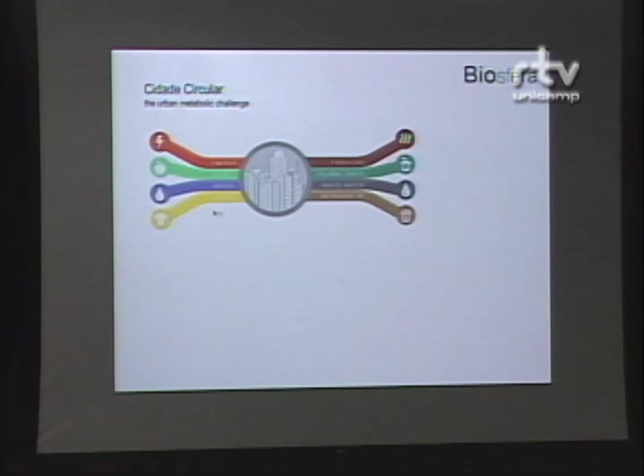What does that mean? Basically, into the city, we have flows of energy, food, water, and goods. And the output of that, for instance, energy in emissions, food in organic waste, water in wastewater, and goods in inorganic waste. Now, looking at the footprint of a city, we see that the more the loops, the cycles of these metabolic flows, are not closed, the larger the environmental footprint of the city. In other words, the environmental footprint of the city exceeds the geographical footprint. So in a circular economy template, we look at how the loops for water, energy, waste, and food can be closed. And in the different technological developments in this sector, water is key.

So basically, a bit about the background. We developed a system called Cidade Circular, which specifically looks at the decentralized possibilities to deal with these metabolic flows in the urban environment. And we introduced this subject exactly a year ago at FIESP. And already then we were talking about the arguments for decentralization, specifically in the water sector. And we put forth some data that we had studied.

For instance, that in the urban periphery of the Sao Paulo municipal area, between 40 to 60% of the households are not connected even to the most basic sanitation infrastructure. But at the same time, 25% of all collected sewage is lost, 25.7% of all treated water is contaminated the moment it hits the supply chain, and then within that supply chain, about 30% is lost through leakage. Now, these are numbers that everybody is talking about, but last year we didn't get the feeling that in that forum at FIESP there was much of a crisis atmosphere.

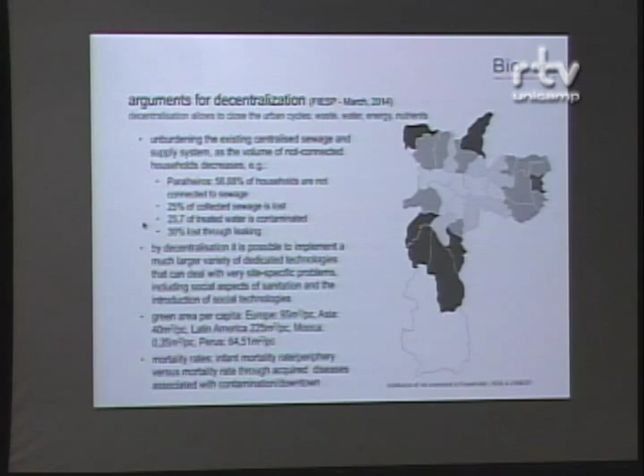We also looked at some other data, for instance, the distribution of green area per capita, and correlations like the mortality rate in the periphery, which is associated with the lack of basic sanitation, is of course much higher than in downtown Sao Paulo. But then when you look at the mortality rate as a result of acquired diseases that are associated with contamination, specifically soil and water contamination, the rates are much higher there.

So in other words, the argumentation for decentralizing the water infrastructure is that you already have an overburdened system, and if you would want to make connections for those households that are not connected yet, you're going to overburden it even much more. Again, I said, where I come from, which is Holland, if we would have these kinds of percentages, there would be a crisis, like governments would fall, utility companies would go bankrupt, people would go to the street. But we found already last year that this is sort of business as usual.

So what is this crisis? Is it really a crisis of drought? I will not go too much into this slide, but basically from the point of view of circular economy, of the urban metabolism, the higher the overlap between natural ecology and monetary economy, the higher the extent of sustainability. Because in the natural environment, the function of symbiosis takes care that all metabolic loops are closed and they are multidirectional. Whereas in our built environment, which is linear, the loops are sort of dots connecting the line and the flows are in one way.

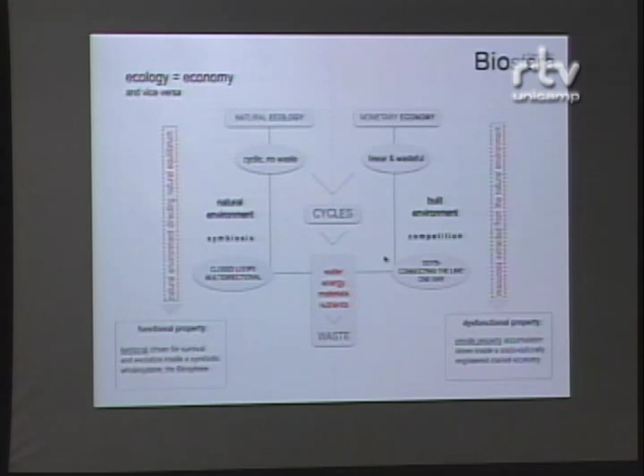So we look at systems, technologies, methodologies, approaches that can close these loops and go to more circular systems, which by nature are more sustainable. Then let's take stock.

In a very straightforward way, I will run the risk that all this may be very simplistic, but I have the urge to take stock after the debate yesterday, because we talk about this crisis and the focus has been very much on the dwindling levels in the reservoirs. But what really is this crisis?

Let's say there's a scenario in which the hydrological system, the rivers, the headwaters, from upstream to downstream in Sao Paulo state and specifically in the urban areas would not be contaminated. The question is, would there still be a drought crisis? If we could use the rivers for water collection, then would there really be a problem?

In other words, the water security in the current water infrastructure is pretty linear, or monofunctional as it's called, meaning that we have a hydrological system with headwaters, with rivers, with tributaries, with a high degree of degradation of the riparian ecosystems and ecosystems in general, and a lot of loss of bioretention. Then we are dependent for our water supply system on the reservoirs, and by now levels are dwindling.

Now whether this is due to climate trends, meteorological trends, man-made or not, of course it's very important to understand that, but on the ground, we can do many things to increase this water security. For instance, the loss of precipitation due to deforestation as a result of the lack of biotic pumps, which is a fancy word for trees, creates an atmospheric block in which we don't have enough precipitation to replenish the reservoirs. But again, basically, the crisis may be one also of management and governance, which was already established yesterday.

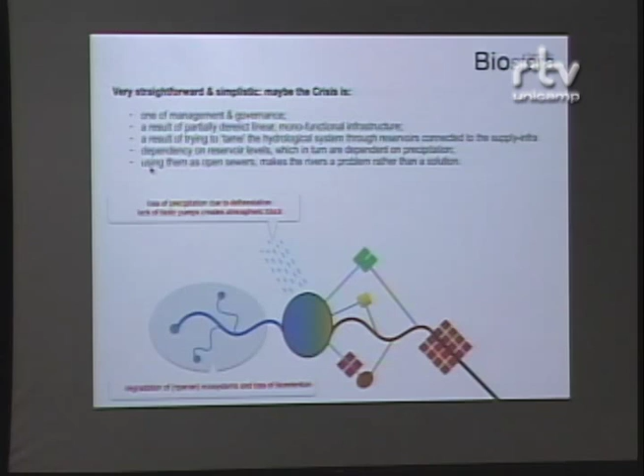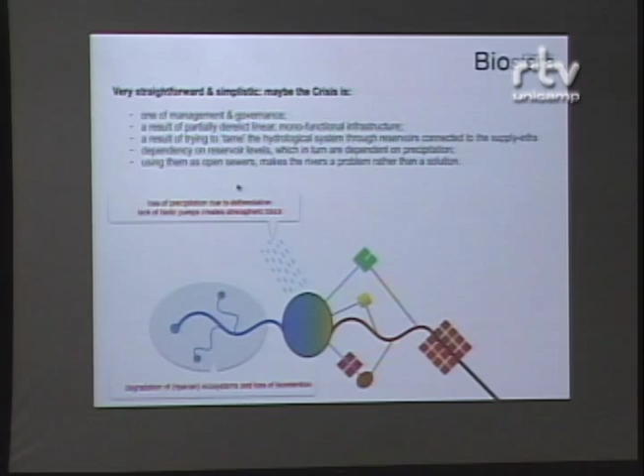A crisis of a derelict linear infrastructure which cannot anymore interact and meet the requirements of the growing urban population, which is also more diversified. Maybe it's a result of trying to tame the hydrological system through the system of reservoirs. And maybe it's also a function of the dependency on those reservoirs for our water supply. And then for sure, using them as open sewers makes the rivers a problem rather than a solution.

So in the same very straightforward and simplistic manner, what would we need? What could we do now in order to avoid this massive problem of overhauling large infrastructure connected to water supply and wastewater treatment? So we can look at water reuse, which will reduce the supplied water out of the reservoirs. For sure, we should look into creating gradual steps in reducing the load of sewage directly into the rivers. In other words, using rivers as open sewers.

And then the water crisis is real. There are people really suffering, really being hit by this, scrambling for potable water on a daily basis. So something needs to be done now to alleviate the situation of these people. And I think most importantly is to showcase systems, to implement pilots so that we can show that this is possible in Brazil, in Sao Paulo, and we don't have to wait for a long-term, multi-year planning stage that is implemented gradually to remediate the current crisis.

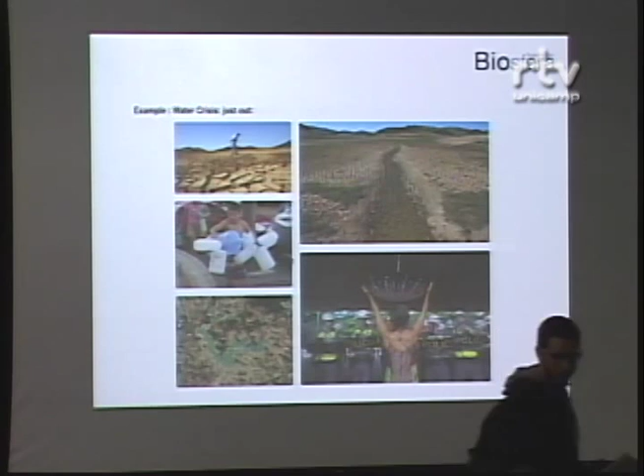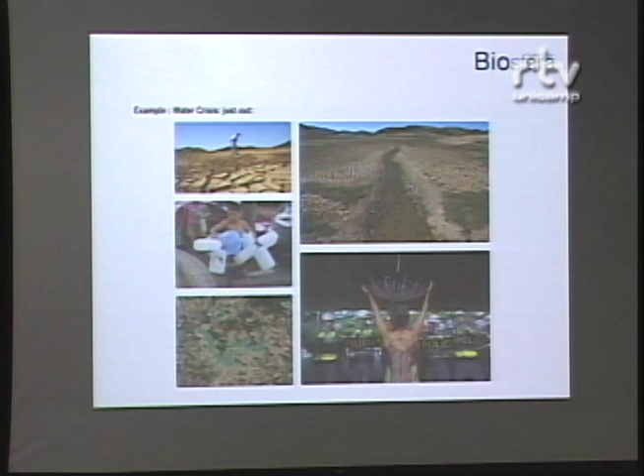So, in all the lectures until now, the pictures of the current water drought are featuring pictures like this, but what I didn't see is a picture like this. Maybe we don't really realize what it means if, on a daily basis, for a prolonged period of time, a young boy has to go out trying to scramble for water. It's a serious problem. It's really something that uproots the daily routine in life.

And the first technology I want to show is something very simple, community-based; it can be implemented with a community, by a community, doesn't require a top-down structure, and actually it's pretty efficient. So, without further ado, it's a project that we're developing together with a colleague of mine, Arturo Vittori, an Italian designer and architect. It's called Warka Water. Warka Water is a very simple structure. It's a structure called a grid shell, which is self-supporting. It's made by a design method called parametric design, which I will not talk about.

And basically you have an outer self-supporting structure, in this case made out of bamboo, which is another story I also want to talk about. And within that structure, a micromesh is suspended. This project was developed for remote communities in Ethiopia that have problems with their water provision. And the micromesh harvests atmospheric water, so dew water, water that is in the atmosphere, which condensates on the filaments of the micromesh.

And with the first pilot in Ethiopia, we were surprised to see, even without further developing the micromesh or optimizing the system, already between 12 to 20 liters of potable water are collected this way, which is good in that context for 3 to 4 households in terms of providing them with potable water. We don't see a reason why a project like this could not be implemented within urban communities in Sao Paulo.

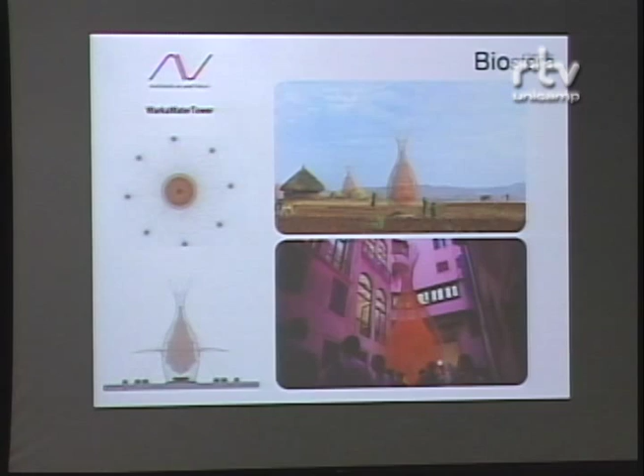Actually, this was also presented last year at Mackenzie. We're talking with Braskem to do the R&D on developing a bioplastic micromesh. And this year, in July, we are organizing a workshop. So here you can see the evolution of this technology. In 2012, there was the first little prototype in Ethiopia that produced the...

I'm sorry. There seems to be a technical problem. So that was a little technical intermezzo. It's a lecture about technology, so I guess that's proper.

So we are organizing this workshop in July within the CAAD Futures. CAAD Futures is a biennial conference about computer-aided design. This year it's actually organized by Unicamp together with USP and Mackenzie, and the subject is the next city.

So here we can see the evolution of the Warka Water bamboo tower. In 2012 we had the prototype for Ethiopia. In 2013 it was an upscaled version of that for Italy. Then last year in 2014 yet an upscaled version for a project in Lebanon. And then this year, as we speak, Arturo is now in Ethiopia doing even a further upscaled version, which will actually be able to service potable water for small towns, small communities, and also project shadow.

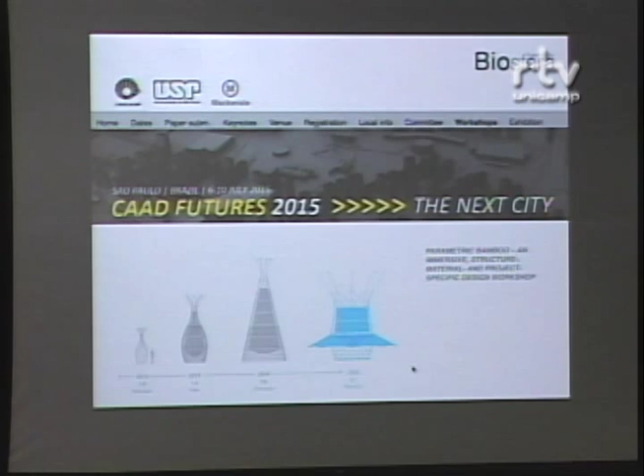And the workshop will be about: if the further evolution of this technology will happen in Sao Paulo, what would it look like? So we will have 2 days with designers, architects, artists, engineers, software developers, to produce a line of Warka Water towers for Sao Paulo. And then afterwards we will implement that as community projects in the Sao Paulo urban regions.

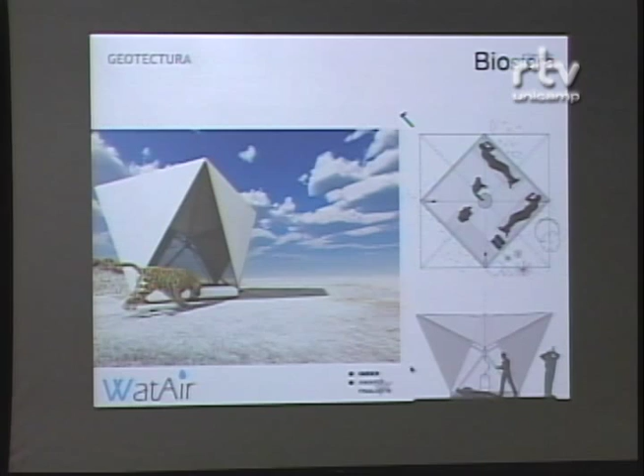Then there's another technology. This is in cooperation with Geotectura, which is an architecture firm that is licensed to the Haifa Technical University, which is called WatAir. And other than the Warka Water tower, this is really a product that could be developed, for instance, by the people that are involved in the communities and are familiar with this technology to sell, let's say, to more high-end markets. It's the same principle, only here we use a more engineered micromesh, and the yield of the micromesh is about 1 liter per 5 square meters.

And of course, there are many factors that influence the efficiency of the micromesh. Basically, those are parameters like the angle, the color, the wind speed, and of course, the humidity level of the atmosphere itself. And also here, we've used a bamboo frame. Water is collected into a bag that can then be placed in a device for potable water.

The reason why I said that this is more high-end is because this micromesh actually allows for the inclusion of a PV thin film, and so electricity is generated. For instance, enough electricity to power up your electrical devices like computers, mobiles, and you name it.

So basically, the cost of a Warka Water tower, the bamboo Warka Water tower in a mid-size version, is about $200, and that's the cost price of a pilot. So if you would create more, we probably can bring this down to $100 per pilot. So if this is shared or donated to a community, this is really a technology that even financially or budget-wise could be implemented now. A unit of WatAir in cost price as a prototype is about $150. But then, of course, the yield is much less because they're smaller units.

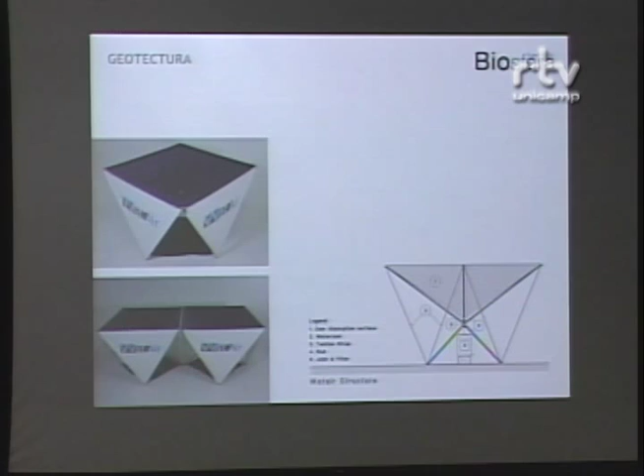So this is one example of how maybe a simple technology and something that looks like a gadget actually really can provide potable water in quite good amounts to communities that need it.

The second technology is a technology by a partner of Fundação Biosfera, Biopolis, and that looks more into the realm of decentralized wastewater treatment technology and water reuse, which is important because if we can implement wastewater treatment decentralized, it's possible to catch the sewage, the contaminants and the pollutants before it actually reaches the rivers.

Now, Biopolis is a spin-off company from Organica Water and Organica Technologies that, under the supervision of Istvan Kenyeres, the founder, has done 200 similar type projects throughout 3 continents using this unique technology, all within the context of urban integration and decentralized wastewater treatment and water reuse.

It's important maybe to understand that in our perception, because we always talk about low-tech, high-tech, breakthrough technology, next-generation technology, the highest tech, from our perspective, in terms of wastewater treatment, is the rhizosphere microorganism symbiosis. Now, yesterday there were some examples of wetlands and the use of ecosystems and the restoration of ecosystem services as a function to treat water.

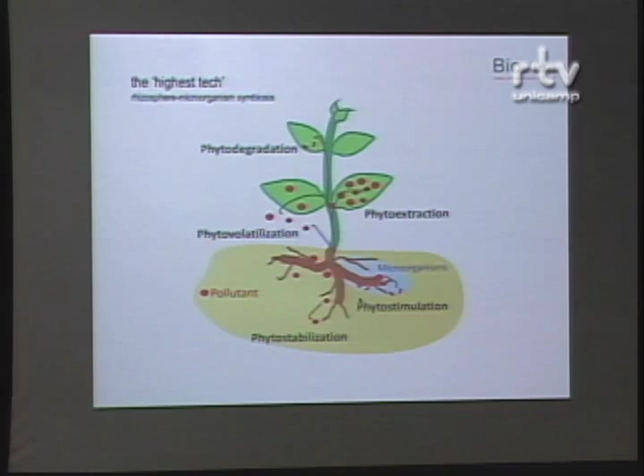And these microorganisms, of course we know this from activated sludge technology, which this year is exactly 100 years old. These microorganisms, bacteria, germs, actually are great agents in treating water.

So Biopolis has established a pilot plant in Budapest, and a pilot plant like that is simply above ground, a botanical garden. Below ground there are a number of installations for pre-treatment, but basically we talk about a garden with many different bioreactors, and the bioreactors of course are the plants.

Now, the reason why it's in a greenhouse is because in Budapest, because of climatological reasons, it's not possible there to do it without a greenhouse. But here in Brazil, it actually could be a garden, it could be a park, and would be perfect to integrate inside urban landscaping, public green.

Maybe we should let Istvan take us a little bit through the pilot plant. Before that, I must say that at the moment, Biopolis is creating an order portfolio for larger installations in Singapore, Malaysia, Japan, China, and also Germany and the Netherlands. Next week, there are some negotiations in the United States, and we really would like to implement a pilot plant. Why not actually in the university campus here of Unicamp, and bring this technology to Brazil.

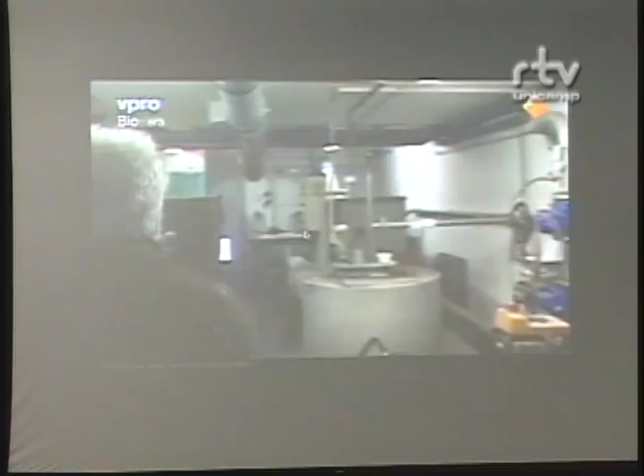So Istvan will talk, I will translate because he speaks Hungarian, it's subtitled in Dutch, I will translate in English, and then she will translate it into Portuguese. So

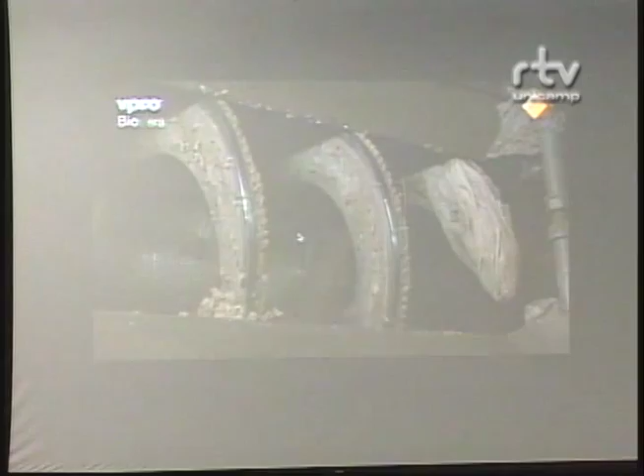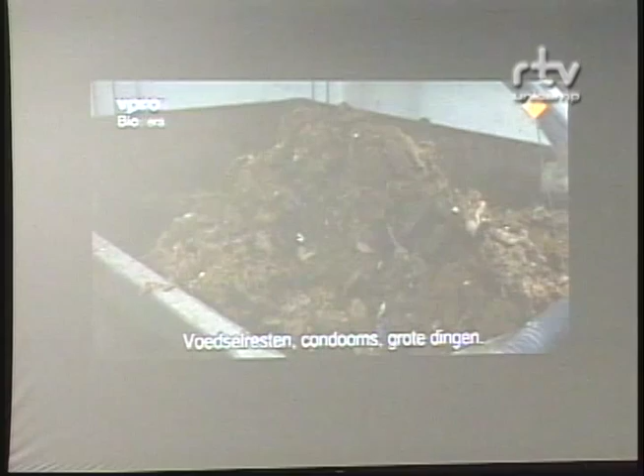Here below the raw sewage arrives. First there is a phase of primary filtering, taking the larger parts out of the sewage, like food rest, plastics, condoms, big things. That goes into the incinerator to generate electricity. Then this filtered water goes to the next phase, in which even smaller particles are filtered out. After that, the water is going into the bioreactors, the biological phases.

So here you see, it's a greenhouse. This is where the biological treatment is taking place with different bioreactors. Here, all the organic pollutants are being taken and processed out of the water, out of the sewage. And of course, we call them contaminants and pollutants, but for the microorganisms, it simply is food.

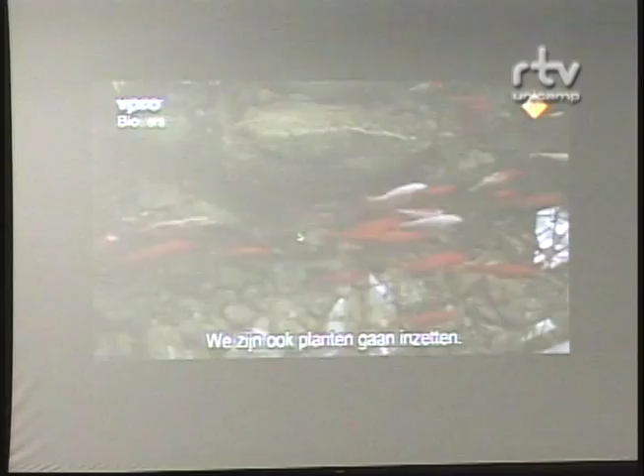The traditional activated sludge process was invented in 1914. And it used only about 100 different species of microorganisms. We, in the meantime, are using many thousands of different species of microorganisms to perform the water treatment. And also, we started to work with plants. Not because plants are such great contaminant uptake agents, but because of the root system, which has a unique surface that creates a perfect habitat for microorganisms.

So the only pollutants that remain are hormones and pharmaceutical residues, but we also identified the bacteria that can even filter this out of the water. If you can create a habitat in which microorganisms and other natural organisms can thrive, then you create a very efficient ecosystem.

An installation like this with a botanical garden of around 400 square meters can service 10,000 users. And it's only 1/5 of a traditional wastewater treatment plant. But the biggest change is the psychological and cultural effect of such an installation. Would you like to live across from a wastewater treatment plant? I don't think so. But what if you live next to or in a botanical garden that, by the way, also treats your wastewater? That's a completely different experience.

I think people should start to think differently, especially people that live in the cities and that aspire to live in and around green areas, especially if it treats their wastewater and produces clean water that can be used for many different purposes. So that was a little introduction by Istvan of Biopolus.

Then basically, we call them productive green areas, which again are fully fledged distributed wastewater treatment plants for water reuse. And again, this diagram explains better how it works: we have above ground the plants, then the rhizosphere is suspended in the water. Now typically the rhizosphere, the surface of the root system, is not sufficient to create a wastewater treatment system that is both technically and economically viable. So there needed to be a means of increasing the root surface artificially.

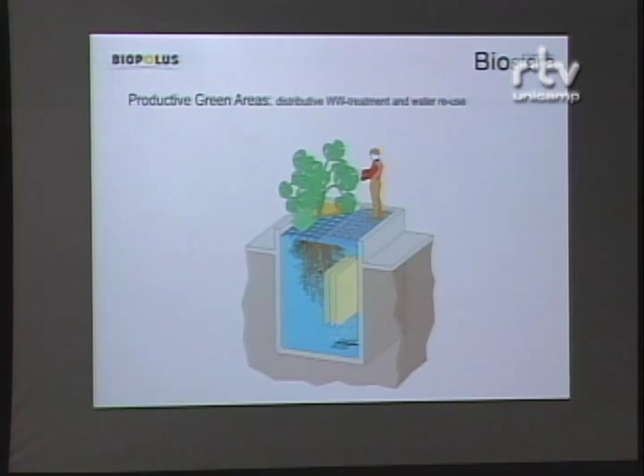Then more in detail, there are the specially selected planted ecosystems, which is a fancy word for different plants. There's a catalog of about 1,200 different plants that all have different endemic microbial species for different functions in dealing with different contaminants and pollutants in wastewater. And about a third of these plant species actually are native species in Brazil.

Now, in order to increase the surface area of the roots, there is a special artificial media developed which allows the microbial colonies, if you will, to create a biofilm on roots. And this is important because in traditional biological reactors, and for instance also in the activated sludge, the microorganisms actually are suspended in the water. They're like in a soup. And it's basically like us. If we are in the water, yeah, we enjoy. But all our actions are a function of not drowning. So the same for microorganisms.

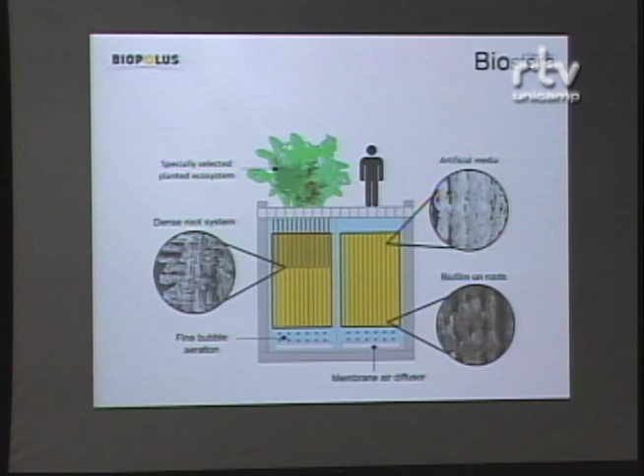That's one of the reasons wastewater treatment plants need to be oxygenated. But when the microorganisms attach themselves to a surface and create habitats as a biofilm, then the activity of the microorganisms is much more efficient, and they are able to deal with a much wider range of metabolic functions, another word for breaking down different contaminants and pollutants.

So just having a bit closer look at that, a section of a natural root and the biofilm it will allow to form on the surface never exceeds 1/10 of a millimeter. But in the artificial root, this artificial media, the biofilm can range from 1 millimeter all the way up to 1 centimeter. And then, of course, in terms of the spatial insertion of the artificial surface where microorganisms can create habitats, there's a ratio, always 1 to 100, can range up to 1 to 10,000.

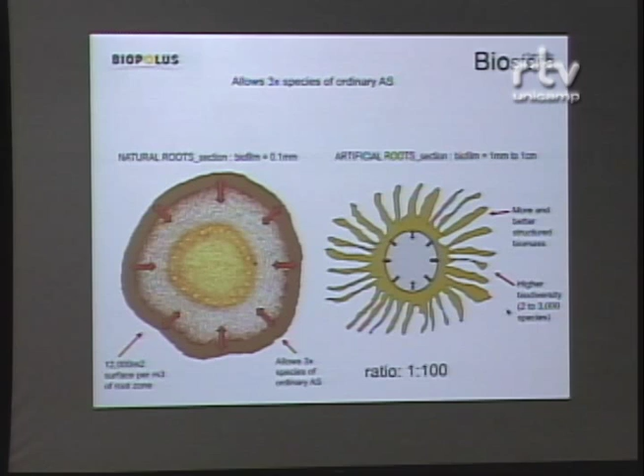Also, the artificial root has a much higher biodiversity than the natural root. It allows up to 2,000 to 3,000 species per bioreactor. Then in terms of the sequencing of this installation, so just to recap, there's the pre-treatment, taking out the larger part of the sewage water. Then there are specialized microbial communities, different types of plants with different types of endemic microorganisms that can treat different types of wastewater, based on whatever context.

You can think, for instance, that these type of decentralized wastewater plants are very good for hospitals, for shopping malls, university campuses. They can be implemented in clustered households like condominiums, but also favelas. They always will look at what are the local requirements of the user, and then the ecosystems, that is the variety of plant species, will be made accordingly into these reactors. Then the output through a phase separation, there are the created water products and the biological products.

So the water products, just as an example, for instance, is domestic non-potable for flushing toilets, showering, doing dishes. There's no reason why the water with this type of bioreactors cannot be upgraded to potable water, but many times legislation doesn't allow wastewater to become potable water, even though with this system we already created water of a better quality than mineral water from a spring.

Then irrigation water can be created. For instance, the microbes can be controlled in such a way that they will leave certain nutrients in the wastewater. So it makes much more sense to irrigate land where the nutrients are already in the water, which is wastewater, rather than using upgraded utility water and then add the nutrients in terms of synthetic or whatever types of fertilizer.

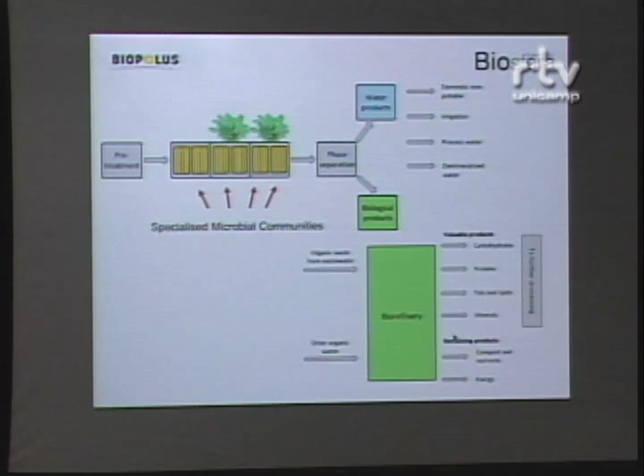Then in terms of the biological products, basically, you have a lot of organic waste from the wastewater itself, even though much less than in conventional systems, because these microbes, other than eating the pollutants, they also eat each other. So typically you're left with much less sludge. And other organic waste, for instance, if you're in a hospital context or a shopping mall context, there are enormous streams of wasted food each day. And this can be processed in a biorefinery and transformed into valuable products like carbohydrates, proteins, fats, lipids, or for instance, into energy or biomaterials.

I will not go into this because I think I will run out of time, but basically the way that the microbes are controlled, manipulated if you will, is through a process of quorum sensing. Quorum sensing is the coordinating of the microbial species through gene expression. They use pheromones, just like plants, just like we use pheromones to, for instance, attract each other.

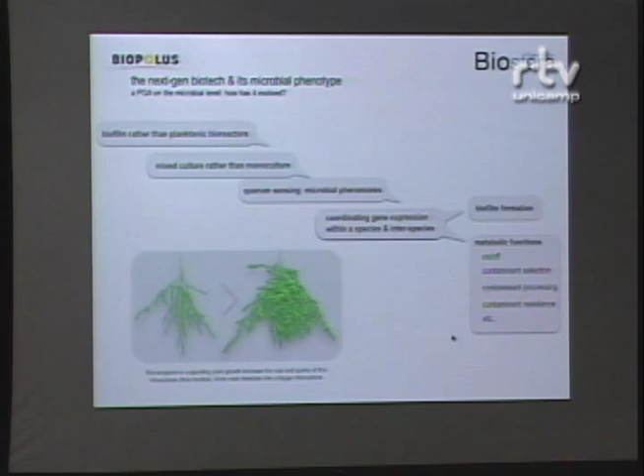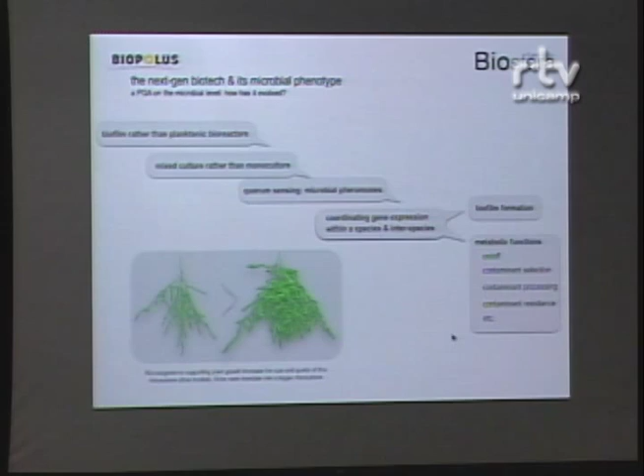And through the understanding of the process of the production of the pheromones for which function, we can start to communicate with the microbes. And we can, for instance, influence the biofilm formation on the habitat, either of the root system or the artificial root system. Or we can start to control metabolic functions, switch them on and off, make them select certain contaminants, make them process certain contaminants in certain ways, make them resistant or non-resistant to certain contaminants, etc. This I will not talk about at all.

I'm having this problem again. I'm sorry. I'm sorry, people.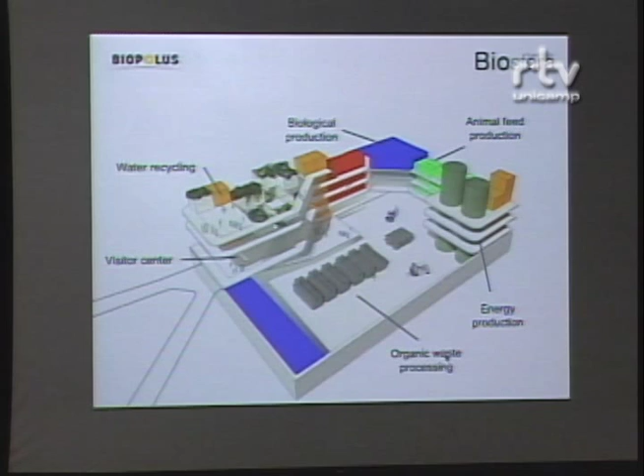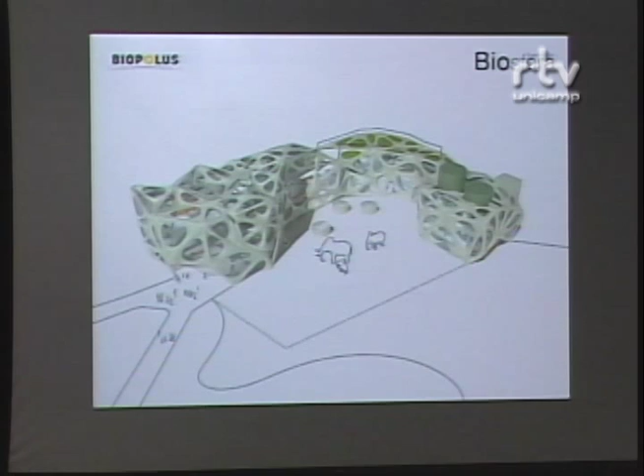There is, out of the biomass that remains of the phase separation, animal feed production, which is very handy in the context of a zoo, and the energy production for all of the zoo, as well as organic waste processing. And it's all integrated into the visitor center of the Budapest Zoo itself. So if we look at this area, it's being encapsulated into an architectural project. Whether you like it or not, the utility infrastructure actually becomes a public space.

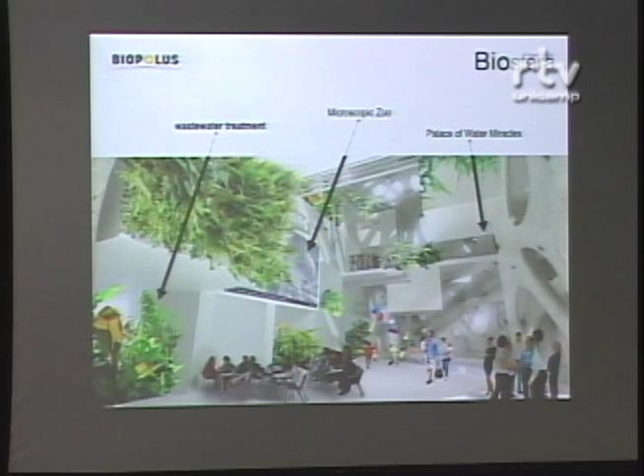So if we go inside, this is an artist impression. So here we have our wastewater treatment plant, which are just sitting bioreactors, providing a nice environment in this zoo. Then also we are developing a microscopic zoo. So this is the part of the zoo that will show the life and anything that's interesting about microbial species. And then we have a Palace of Water Miracles, where we show what microbial species can do with water. And actually, we show also how this process works. So it's all open to the public.

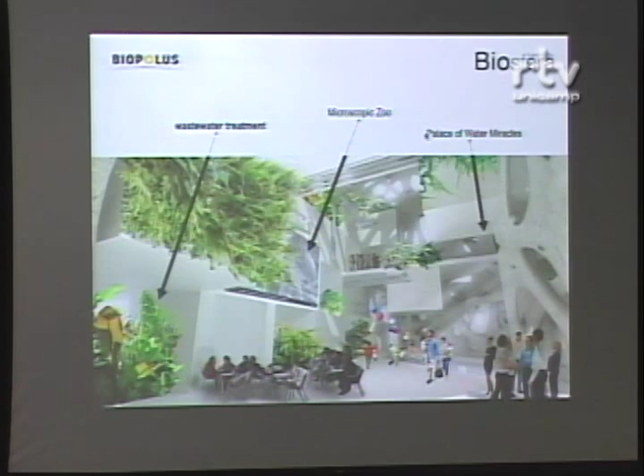Then, if we look at it, what can you gain with this? Well, you can gain 65% reduction in primary energy uses. You can reduce 95% of the freshwater requirement, and this is what we talk about these days. How can we reduce the water requirement? Here you go, 95%. So only 5% of the water requirement of a very large area remains. And 90% reduction in waste generation.

So how does that then translate into numbers? For instance, out of this specific project, which again is a visitor center of the zoo integrated with its utility infrastructure, we generate renewable energy worth 9 megawatt, which is all the electricity requirement of the zoo. Recycled water is 10,000 cubic meters per day. The organic waste processing is 5,000 tons per year.

And the investment cost, including the architectural project, is 10 million euros, with a return on investment of 5 years, because you're generating your energy with a surplus. You create your own animal food, and you have a whole range of biomaterials, raw materials that can be sold out. So what in the past would be a cost of the utility company, now it's a gain.

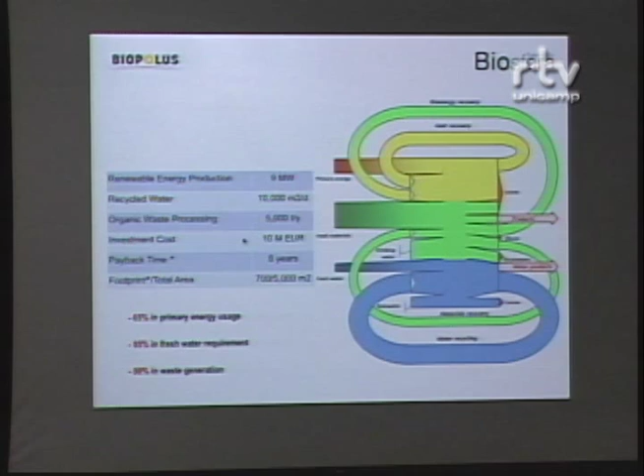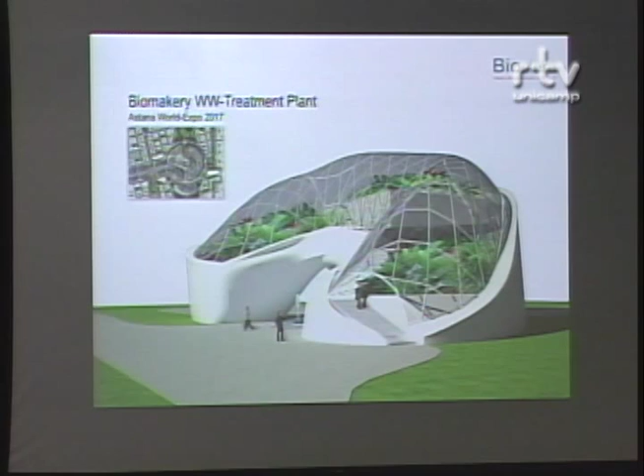Then here are some other projects that are being developed now. This is the wastewater treatment and energy provision for the Astana World Expo in Kazakhstan in 2017. There is, in the same country and also in Singapore, the so-called bio-industrial park, which looks at exactly the same technology, but upscaled to deal with all the flows of an industrial condominium. In this case, for instance, a bioethanol plant, biopolymer factory, biopharma plant, and a fertilizer plant in the biochemical cluster. And in the agri-food cluster, we have a meat factory, a compost factory, a greenhouse, and a biofood factory.

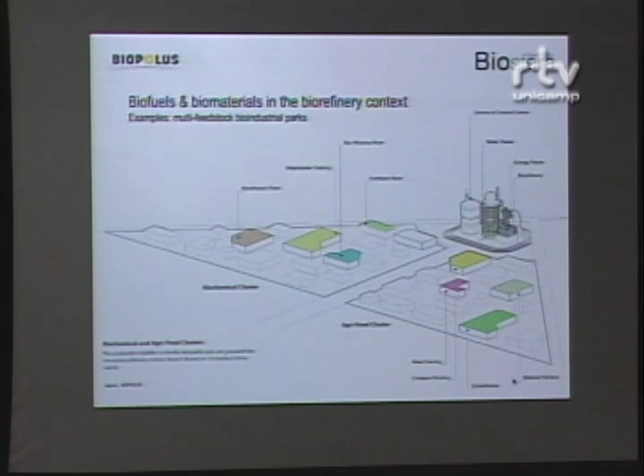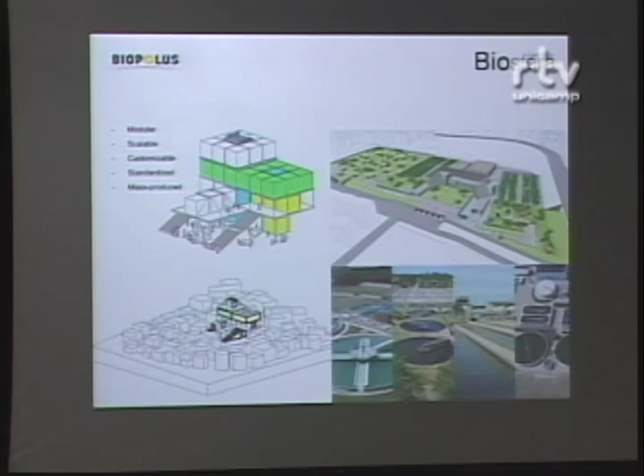So wrapping up, this technology can also be introduced as a so-called disruptive technology. We call them the water moles or the water hubs for development areas, such as favelas, which are modular and scalable. They can be customized to meet any requirements. They can be standardized, so they can be mass-produced, lowering the price per unit. So the question really remains, where do we want to go? Do we want to remain in this sort of alien landscape of traditional wastewater plants, or do we want to go to these productive green areas, integrating and decentralizing our utility infrastructure into productive green areas in the urban environment?

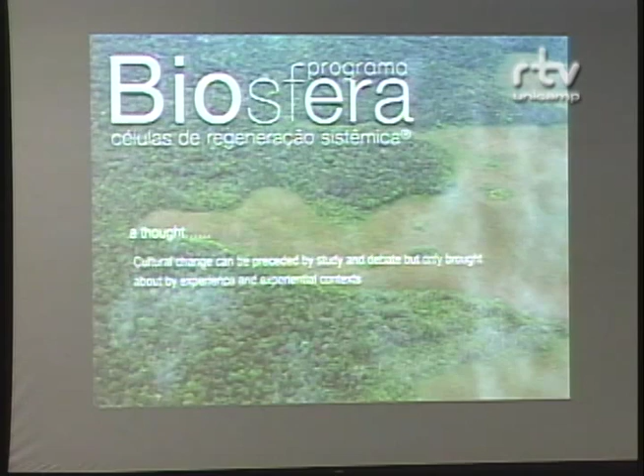So just a thought that I was having yesterday during the lectures when there was a talk about the requirement for cultural change. I think really if we talk about a crisis with regard to the utility infrastructure, not just water, also energy, the extraction of resources out of the natural environment, here in Brazil there may be some kind of cultural crisis where a tipping point is reached. Technologies, methodologies, approaches need to be diversified, need to be decentralized. The top-down model, the vertical line, has to become horizontal.

So, of course, debate and study is adamant, and the university as a sort of switchboard between the public sector and private sector really has a function. But let's not forget that study and debate can and many times precede cultural change, but real cultural change is brought about by first-hand experience, by, if you will, an experiential context. And this is the reason why I think it's important to implement pilots and showcases.

And we work with a very large portfolio of technologies, some with a high technology readiness level, some already implementable, some just ideas of PhD students that still need a proof of concept. But let's try and see how together we can implement the showcases, so we have a point we can point our finger to and say, look, this is possible in Brazil, and this will eventually help us to deal with the current crisis and possible crises ahead.